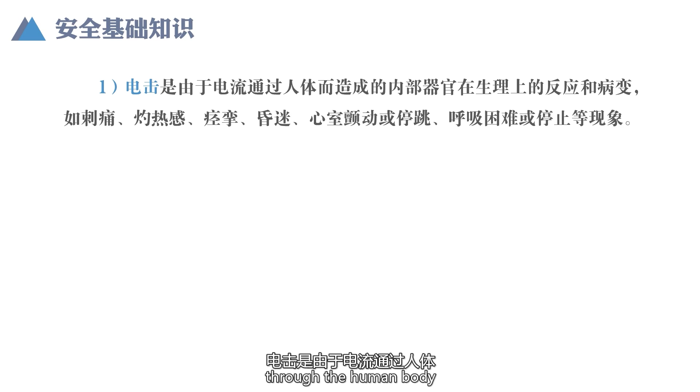Such injuries are multifaceted. Generally, they can be divided into two categories, electric shock and electric injury. Electric shock is caused by the passage of electric current through the human body and causes

physiological reactions and lesions of internal organs, such as tingling, burning sensation, spasms, stupor, ventricular fibrillation or arrest, and difficulty breathing. Electric shock is one of the most dangerous types of electrocution. More than 80% of electrocution deaths are caused by electric shock.

When electric shock occurs due to low voltage, the fatal current is small. The damage is mainly internal to the body. There are no visible signs on the outside of the body.

Electrical injuries are due to thermal, chemical, or mechanical effects. Injury to the human body's exterior often occurs at the same time as electric shock. The most common are the following 5 types.

Electrical burns generally occur in low voltage equipment or low voltage lines and involve contact between the body and an electrically charged object. Electricity passes through the skin of the body, and the conversion of electrical energy into heat causes burns.

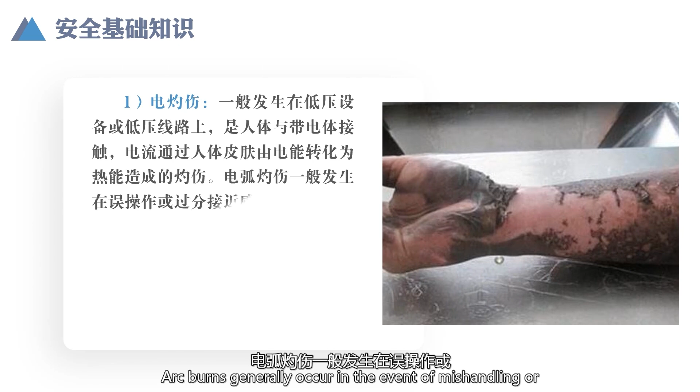Arc burns generally occur in the event of mishandling or excessive proximity to an inductive charged body, with injury caused by arc discharge. Burns are caused by the conversion of electrical energy into heat energy.

When it produces an arc discharge, a current passes through the body, causing burns to the skin, or a high temperature arc occurs near the body and burns the skin like a flame, including burns caused by the splash of molten metal liquid.

Due to the high temperature of the arc, it can cause large deep burns, or even charring, burning away the body's tissue. Unlike electric shock, electric arc burns leave visible marks on the surface of the body, and the current is very high.

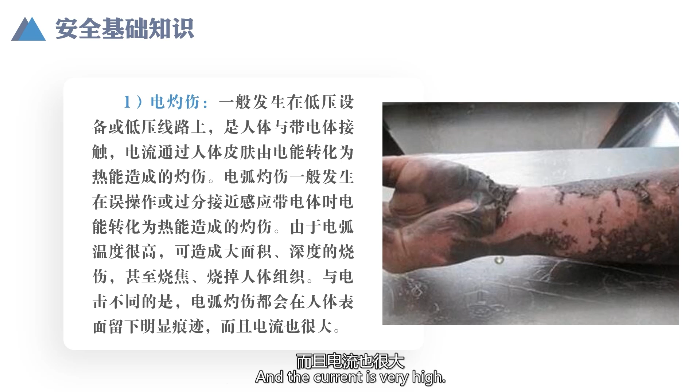Electric branding occurs when the body is in good contact with an electrically charged body. In this case, a permanent mark similar in shape to the connected charged body will be left on the surface of the skin.

Electrocautery marks sometimes do not appear immediately after electrocution, but rather appear after a period of time. Electrocautery marks are usually not inflamed or pus-filled, but they often cause the scarred skin to lose its elasticity and luster, with epidermal necrosis and loss of sensation.

Metallization of the skin: due to the extremely high temperature of the arc, it can cause surrounding metal to melt, evaporate and splash onto the skin's surface. The surface of the skin becomes rough and hard.

The color depends on the type of metal, such as grayish yellow for lead, green for copper, blue-green for brass, etc. Metallized skin will automatically fall off after a period of time. There are usually no adverse effects, but skin metallization often occurs at the same time as arc burns.

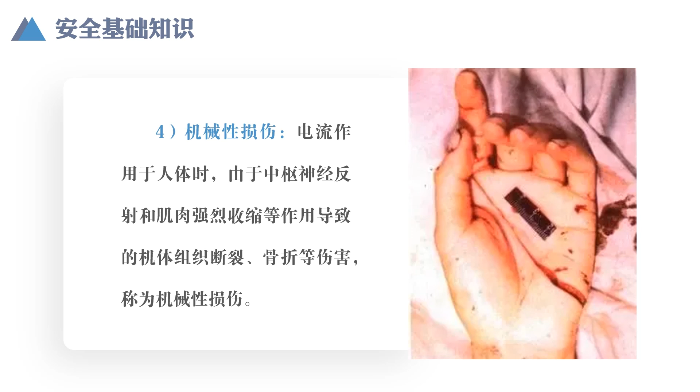Mechanical damage: when the electric current acts on the human body, the central nervous reflex and strong muscle contraction, etc., lead to tissue rupture, fractures and other injuries. That is mechanical injury.

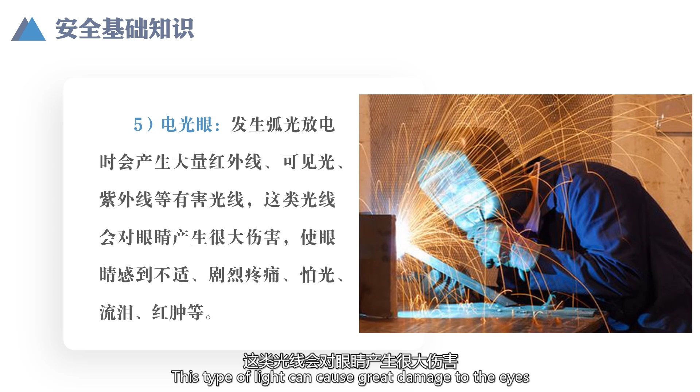Electro-optic eye: when an arc light discharge occurs, a large amount of infrared light, visible light, ultraviolet light, and other harmful rays are produced. This type of light can cause great damage to the eyes, causing discomfort, severe pain, fear of light, tears, redness, and swelling.

In addition, human electrocution is often accompanied by mechanical trauma such as falling from heights or a fall. Although this kind of trauma is not direct injury of electric current to the human body, it can be regarded as secondary accidents caused by electric shock, and should also be included in the category of electrical accidents.

When electric current passes through the human body, the degree of injury to the human body is related to the size of current, duration, pathway, type of current, and the condition of human body, etc. And there is a very close relationship between the various factors. When an electric current passes through the body, the human body will feel numbness, pain, and other sensations. In more serious cases, it can cause tremors, spasms, the heart stops beating or death.

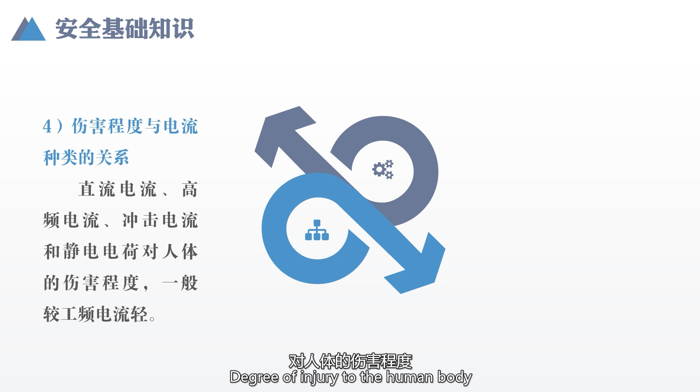Relationship between the degree of injury and the type of current. Direct current, high-frequency current, surge current, and electrostatic charge cause a degree of injury to the human body generally less severe than industrial frequency current.

Relationship between the degree of damage and voltage. When the human body has a certain resistance, the higher the voltage, the more current flows through the body, naturally causing more damage. The safe voltage for general environment is 36 volt. Due to the different conditions of the human body, different people have different sensitivity to electric current, and the degree of danger differs for different people when they are subjected to the same electric current.

Different people have different levels of danger when they are shocked by the same electric current. Women are more sensitive to electric current than men. Children are less likely to get rid of electric current from electric shocks than adults. When a person has a heart condition, shock injuries are more severe than in able-bodied people.

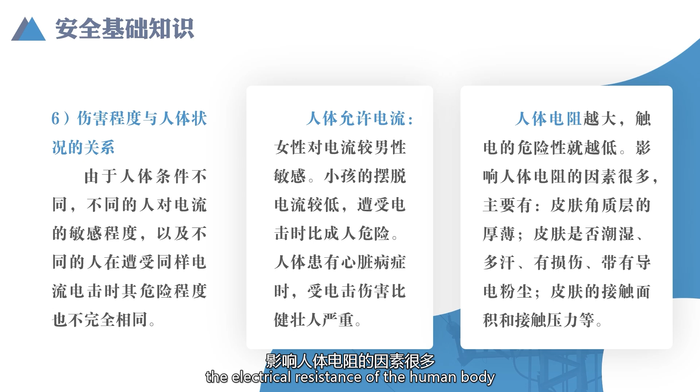The greater the resistance of the human body, the lower the risk of electrocution. There are many factors that affect the electrical resistance of the human body. The main ones are the thickness of the skin, stratum corneum, whether the skin is moist or not, sweating, damage, the presence of electrically conductive dust, skin contact area, contact pressure, etc.

There are many ways in which the human body can be electrocuted. According to the way the human body touches the electrically charged body and the way the current flows through the body, they can be divided into single-phase electric shock, two-phase electrocution, step voltage, induced voltage and lightning shock.

When the human body directly touches the conductor of one phase of energized equipment or line, current flows through the body, and the phenomenon of electric shock is called single-phase electric shock. There are two kinds of cases: neutral point directly grounded network and neutral point not directly grounded network. Neutral point directly grounded network: the occurrence of single-phase electric shock is shown in Figure 1.

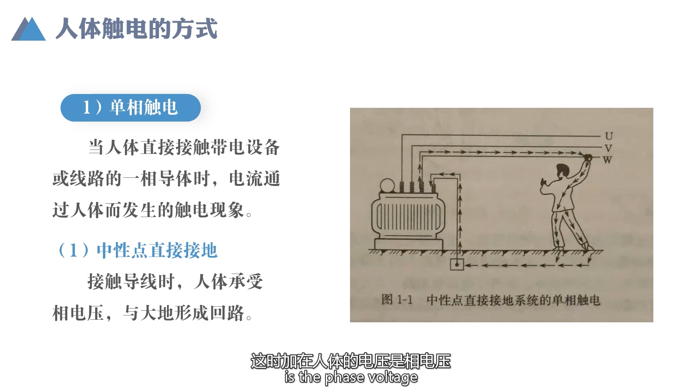Current flows from a phase wire through the electrical equipment, human body, and then flows back to the neutral point through the earth. The voltage applied to the human body is the phase voltage. The degree of danger depends on the contact resistance between the human body and the ground. If a person stands on a dry, insulated floor, the insulation resistance between the human body and the earth is very high. The current through the body is very small. There is no danger of electric shock, but if the floor is wet, there is danger of electric shock.

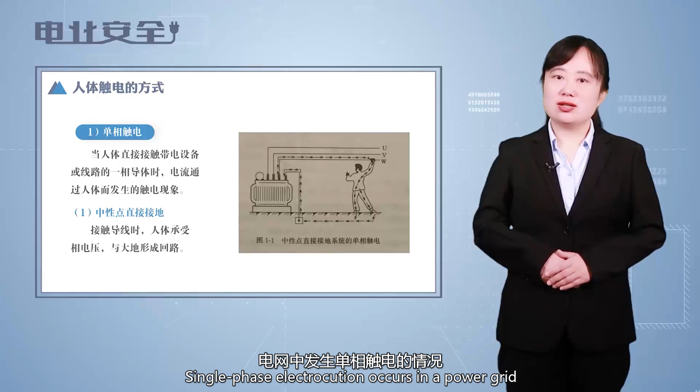Neutral point is not grounded: single-phase electrocution occurs in a power grid as shown in Figure 2. In this case, current will flow from one phase wire through the electrical equipment, through the human body, to the other two phase wires, insulation resistance to ground, and distributed capacitance, and form a circuit.

At this time, the magnitude of the current through the human body is related to the line insulation resistance and capacitance to ground. In the low voltage grade below 1 kilovolt, the capacitance to ground is very small. The current through the human body mainly depends on line insulation resistance. Under normal conditions, the insulation resistance of equipment is quite large. The current through the human body is very small and generally will not cause harm, but when the insulation of the line drops or is damaged, there is still a danger of electric shock.

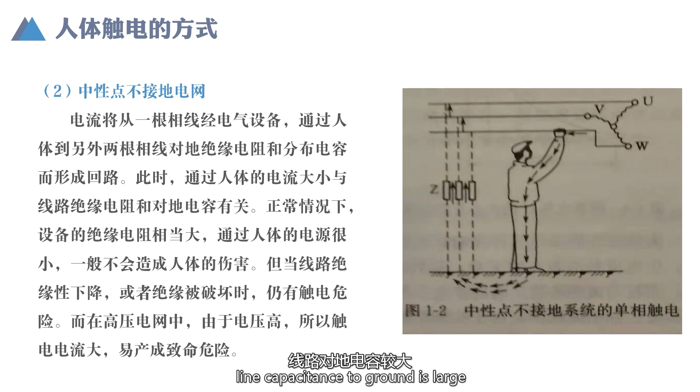In a 6 to 10 kilovolt high voltage power grid, due to the high voltage, line capacitance to ground is large, so the electrocution current is large. The capacitive current through the human body will jeopardize the safety of the electrocuted, plus arc burns can be fatal.

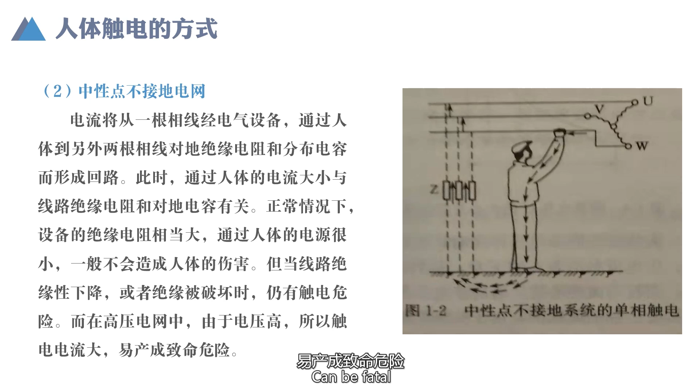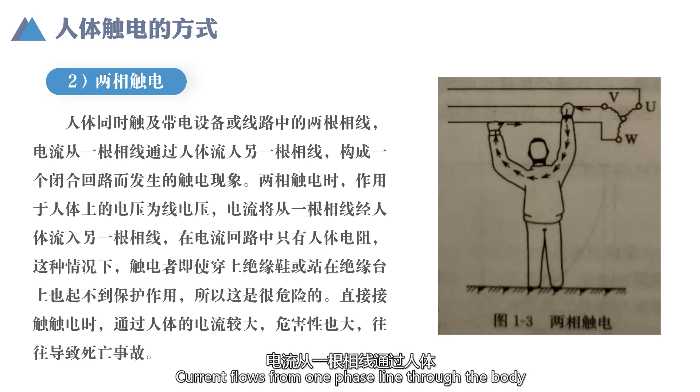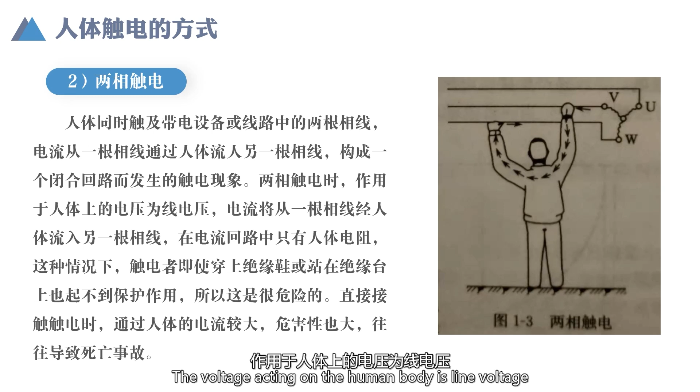When the human body touches two phase wires of energized equipment or a line at the same time, current flows from one phase line through the body, through the other phase line, and constitutes a closed circuit. This phenomenon of electrocution is called two-phase electrocution, as shown in Figure 3. In two-phase electric shock, the voltage acting on the human body is line voltage. Current will flow from one phase line through the human body into the other phase line.

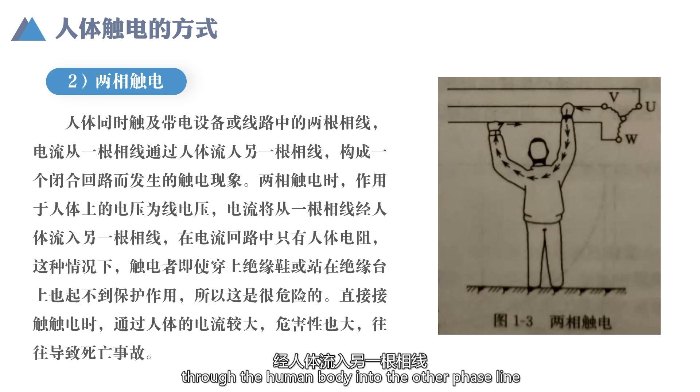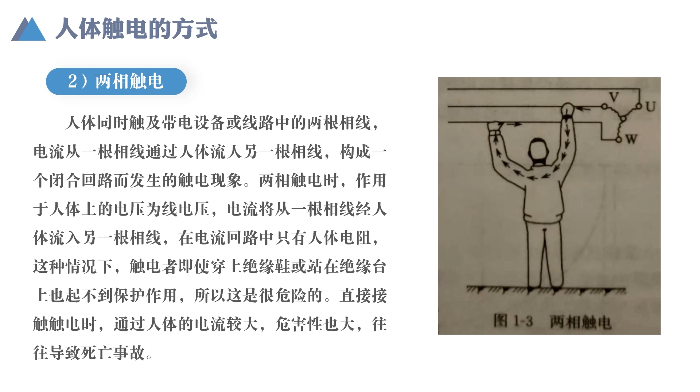In the current loop, there is only the body resistance. In this case, even if the electrocuted person wears insulated shoes or stands on an insulated platform, it can't protect him. So it's very dangerous. When electrocuted by direct contact, the current through the body is larger. The danger is also great, often leading to fatal accidents.

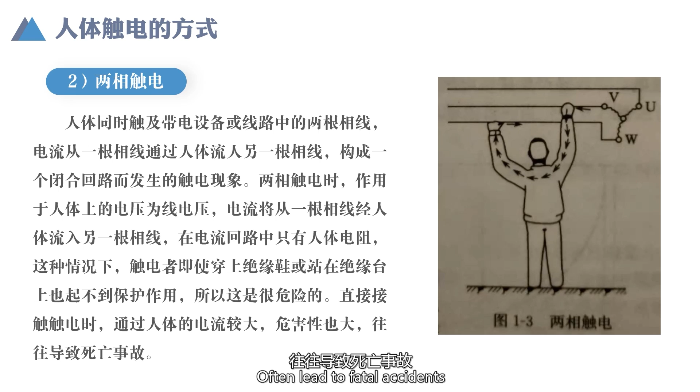When a ground fault occurs in electrical equipment, ground current spreads through the grounding body to the earth, and generates a large electric field in the ground around the grounding body. The strength of the electric field decreases with increasing distance from the grounding body. Within 1 meter from the short circuit point of grounding, about 68% of the voltage drops.

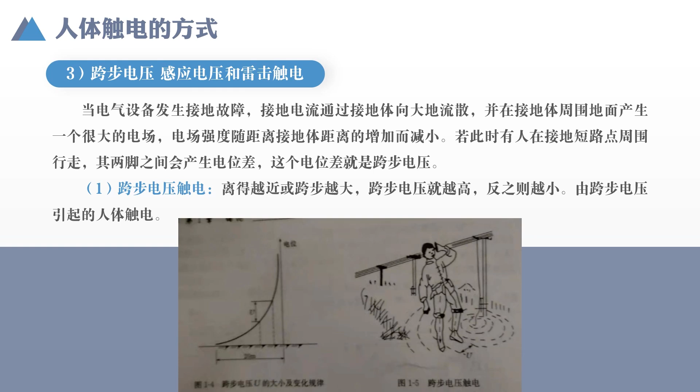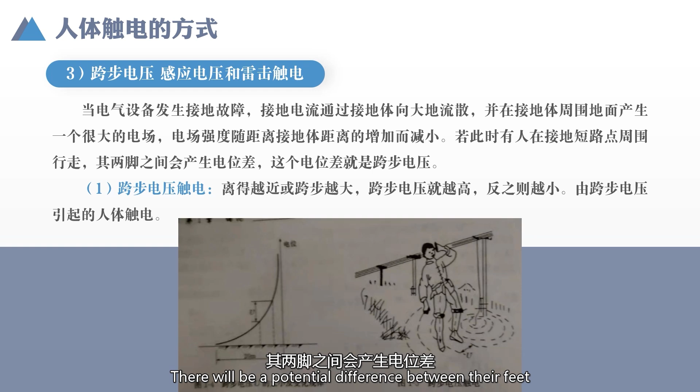Within 2 to 10 meters from the grounded short circuit point, about 24% of the voltage drop; 11 to 20 meters from the grounded short circuit point, approximately 8% voltage drop. If someone walks around the short circuit point at this time, there will be a potential difference between their feet. This potential difference is the step voltage.

Its value changes with the distance of the human body from the grounded body and the size of the step. The closer the distance or the larger the step, the higher the step voltage, and vice versa. The electrocution caused by step voltage is called stride voltage electrocution.

When a person is subjected to step voltage, the electric current flows along the lower limbs, from the feet through the legs, the crotch, and then to the feet and the earth to form a pathway. It doesn't pass through the vital organs of the body. It seems to be safer, but it's not, because when a person is subjected to a higher step voltage,

it can cause the body to fall to the ground. This not only increases the current applied to the body, but also changes the path of the current through the body. It's entirely possible that it could flow from the head to the hands or feet. Experience has shown that after a person falls to the ground, if the current in the body continues to act for more than 2 seconds, this kind of electrocution is fatal.